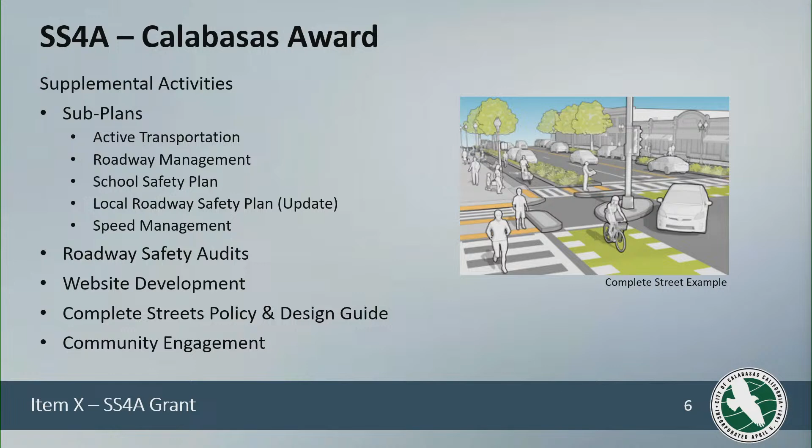Demonstration projects that we have planned include a Hawk signal at Mulholland and Eddingham. This is a project that we've been trying to do for a little bit and have been unsuccessful, and now we have the money to do it. That's that high activation crosswalk you see popping up everywhere in Los Angeles. It pretty much forces the intersection to become a signal when there's a pedestrian, and then once the pedestrian walk phase has ended, it turns into a stop, and then the signal turns off completely.

We're also looking to do a temporary roundabout at Las Virgenes and Thousand Oaks, a temporary Class 4 bikeway on Lost Hills Road, and then we can do mini grant competitions, so crosswalk art to get the schools involved and all of our students, and then a traffic safety poster series for the entire community.

Yes, Chair. Vice Question, Chair. What do you mean by temporary?

Since this is a demonstration grant, we're not allowed to do any concrete work. So the roundabout and the bikeway will be constructed with material that can easily be removed in case it's seen as a failure. So if the public doesn't like it, if it ends up becoming more of a problem than a help, we can easily remove it.

Usually how long is that trial period? We're required to have it in for at least 2 weeks, but some of these projects done in other municipalities have had them in for 5 years. Okay, well, a trial in for 5 years. So it worked out so well they were able to keep the demonstration material in. Oh, okay, well...

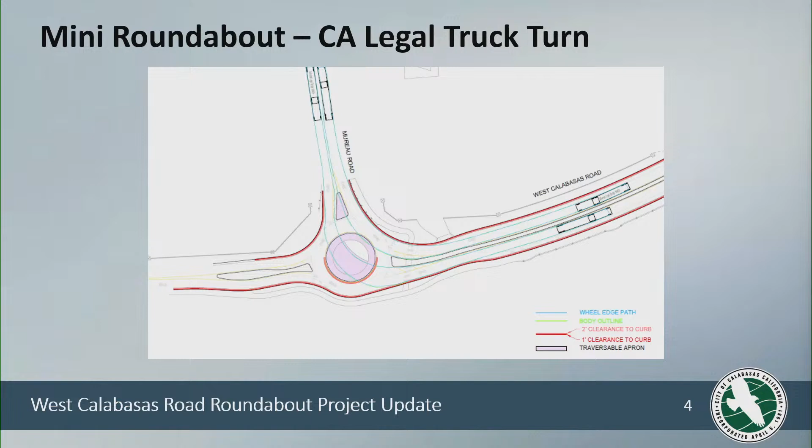By looking at all of that, and analyzing the cost estimate, the only saving — sorry, I'm jumping a bit ahead, but these are the major points — the construction cost saving was not as great as we expected from removing those retaining walls, as you can see from this exhibit.

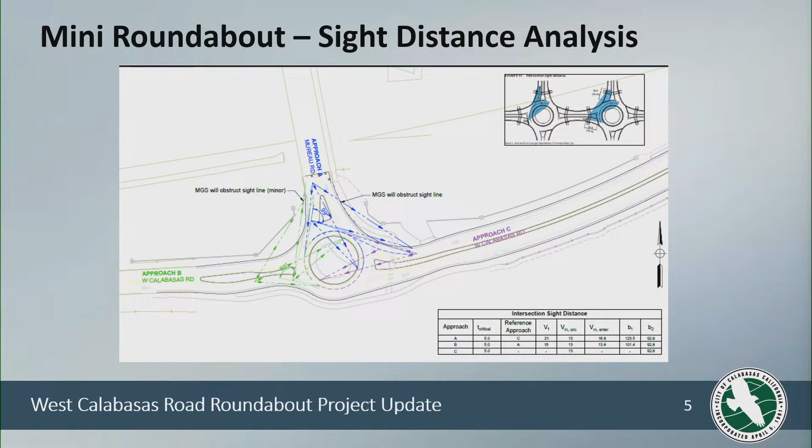Trot, do we have a picture of what's there now? I don't have it as part of my presentation, but we can probably pull up Google Maps to look at that. Okay, and I have one question, because I'm a little confused between the mini roundabout and the single roundabout — what examples do we have in the city of a mini versus a single? We don't really have a mini roundabout in the city.

We do have traffic circles, which is probably going to be the closest design option to the mini roundabout. Can you give me a location example? Traffic circles we have in Park Sorrento. Okay, yeah, those are traffic circles.

Those are not roundabouts. The roundabout is designed for the full movement, a full circle with approach, designed to slow traffic on the approach to the roundabout and direct the movements, angling them correctly so they go around. So those mini traffic circles are similar, but not exactly.

Just to add color, I think what you referred to as a mountable roundabout means that because the truck is wider, it would be able to go over the roundabout, since it's kind of like a bump in the road. Correct. The truck won't be able to make the full movement going around, so they would just go over it. Right, so that was one of our big concerns, that it will not be as effective.

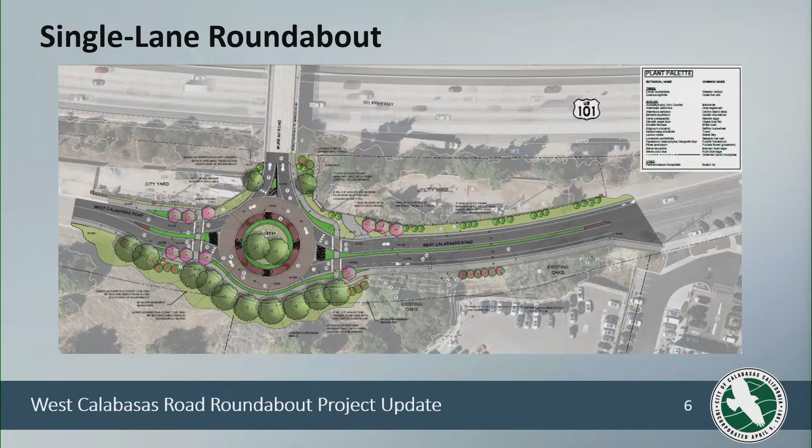That's exactly it, and this was actually the original idea. Staff recommendation, after we looked at this analysis performed by the consultant—and you have in your package the exhibits and the report, with more technical details in there, and if you have any questions I'll be happy to answer them—is to proceed with the single lane roundabout design. If you have any comments or questions you'd like incorporated into the final design, we'd be happy to take your input.

So what do you need from us, is this just informational? This is informational. However, if you have any comments or questions, this is actually a good time for us to take note of it.

Good. I guess my comment would be that the single lane roundabout would be the most appropriate way to go, since we still want some sort of barrier to protect cars or prevent them from plowing straight through—at least we have some landscaping in there that can provide that. I don't see any other option, so in my opinion this would be the way to go.

You mentioned before, but one more time, what problem are we providing a solution to? The traffic pattern at this intersection—you can see a heavier traffic pattern in the morning related to the school.

You also see traffic from the car dealerships going through the intersection, testing cars, going all the way to the west end of Calabasas Road. The west leg of Calabasas Road is basically a dead end, so there's not much traffic going that direction. For that traffic pattern, and as you're well aware, Mureau Road and this route actually serve as a detour when the freeway is backed up. Again, the west leg of the intersection isn't used much, so for this traffic pattern, a roundabout is the most beneficial design for this intersection to accommodate these movements.

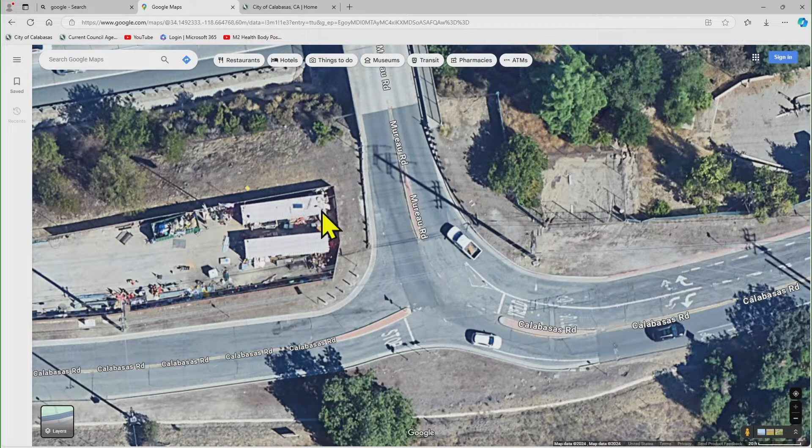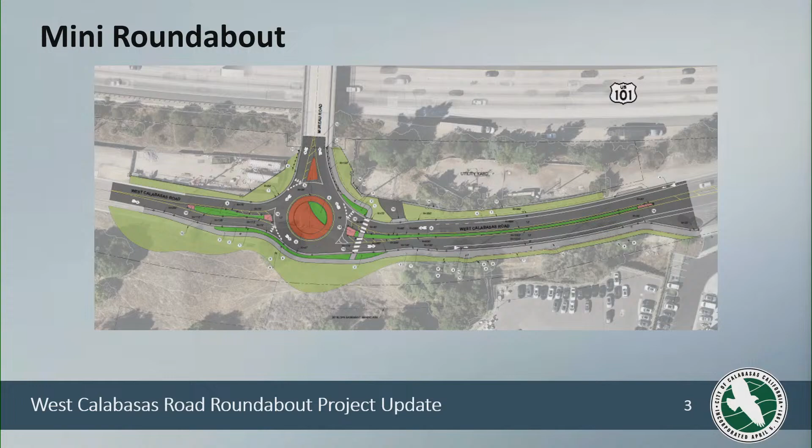There is a standard. There are certain design standards and design criteria for the roundabout—you can't just easily play with the width. That's what the designers are doing when they're looking at the size of the roundabout, but it needs to be according to the entire width. Then there's a travel lane width, and a certain diameter for this roundabout for it to work, to provide that circular movement.

Is it being tracked and monitored by any organization that comes to double check the work, to see how wide it is or how it's been built? There are just the design standards that the engineers have to follow. For example, for this design, we had a third-party traffic engineer also review it. They're experts in roundabouts, more so than the civil engineering company working on the design—they're well qualified in roundabout design too, but we also had a traffic engineering expert reviewing it.

Do you know how many we currently have in Calabasas? We have a lot of traffic circles. I don't know the exact number. Well, the biggest one that comes to mind is on Parkway Calabasas, right? That's a great example. And then we have a few other traffic circles—Paul Revere, and the Eddingham area. Yes, and there's Park Sorrento—there are three mini circles on Park Sorrento, and there are probably three or four more in that area.

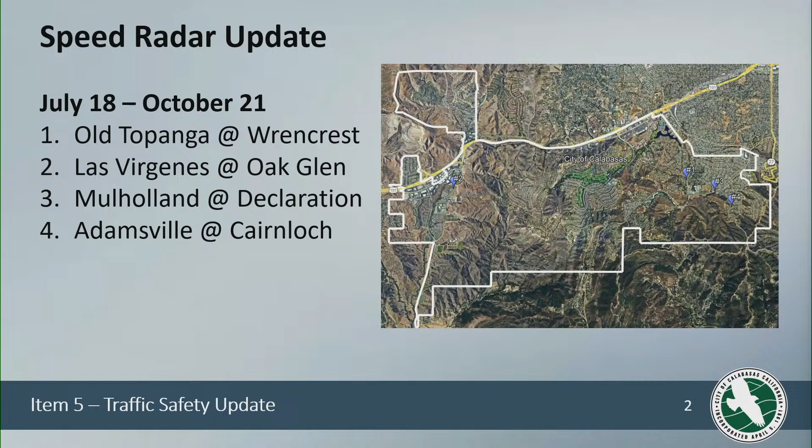Here's a look at our average speed, our 85th percentile, and our violator speed. One thing to note, we are currently working on that site number 2 for Las Virgenes. The device was incorrectly coded to a speed limit of 40, so we don't have the violator percent. They're working on fixing that on the back end for us, but I didn't have that in time for today's meeting. It is definitely lower than 7.7% though.

That's the violator percent if we say that that section of road is 40 instead of 45. And then Mulholland at Declaration, we do have a higher violator percentage of 6.8%, which we alerted the Sheriff's Department, and they're out there doing a lot of enforcement this year. And then on Adamsville, we have a violator percent of about 3.4, but our average speed is 28, so going downhill in a 25, that's very expected.

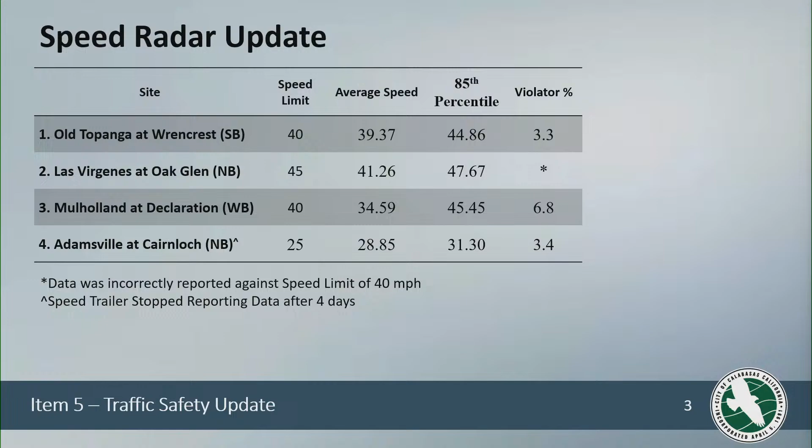Another thing about site number 4, is our speed trailer actually stopped reporting data digitally to us. We're looking to see if it's still recording the data and just not transmitting it, but we will have an update on how our trailer is doing, hopefully very soon.

We met with the Sheriff's Department last Thursday, and our enforcement priorities are Las Virgenes Road, and they are very focused on the school area traffic for Mulholland Highway.

Can you go back one slide? I'm not sure I understand when you say 85th percentile.

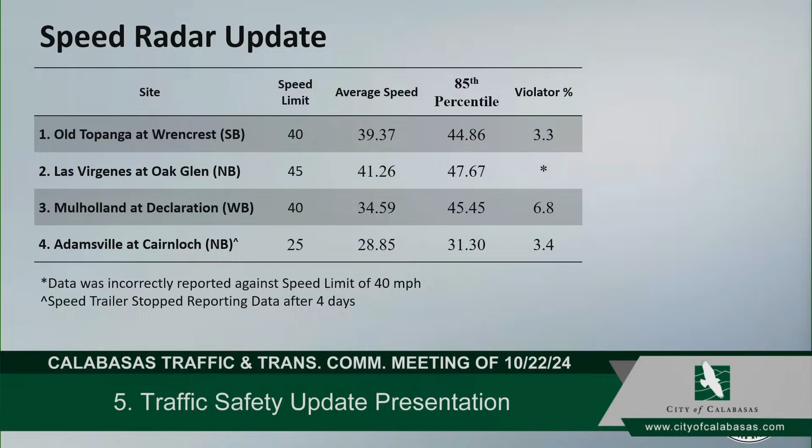So 85th percentile is, Tom Miracle explains this much better than I do. He's explained it a couple of times before, but the idea behind the California Basic Speed Law is drivers are going to drive a speed that feels comfortable to them. And when you're setting speeds, we are required by California state law to set them per the 85th percentile. So for example, Old Topanga, we look at the 85th percentile, almost 45, we get to round down to 40, and that's the current speed. And so it's that idea that on average, people...

Want to drive a safe speed, and we set the speed for that road. So for example, you don't want someone driving 40 because it feels good, it feels safe, and you've set it at 25. That's considered a speed trap.

Okay. Thank you. So I think it's important to note both speeds, the average speed that on average people are going, and then that 85th that we have to abide by. Okay. Thank you. Of course.

And then this is another informational item for you. So any more questions? Awesome.

Okay, next. Next is the division report.

I would like to start with the exciting news. The Las Virgenes Green Street project is complete, and we're having a ribbon cutting ceremony tomorrow at 3 p.m. at the site. And there will be a shuttle provided for leaving city hall.

But after meeting with the water district staff, it was determined that relocation is not necessary, so there will be no more disturbance to traffic. What we ended up doing, the contractor did the improvements shown in the picture on the right. We did the bright paint and additional sign for road narrows, and since that vault is not encroaching into the roadway, the water district is actually happy to leave it at its present location.

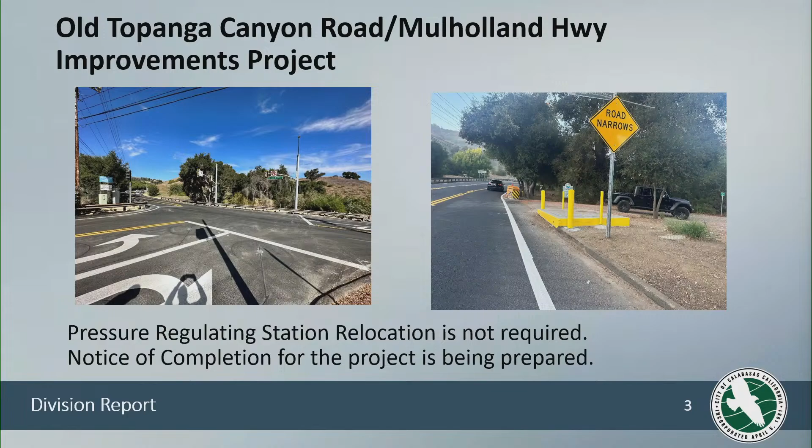On that, if I may, if you remember last meeting, I brought up something about that extra stop sign when you were on Mulholland heading towards Viewpoint and came to that three-way intersection. Whenever is the right time, you mentioned I can bring it up, I don't want to interrupt you. It's coming in my presentation.

Thank you. Next project I'd like to talk about is the bike lane conflict striping project, which was also reported previously to the commission when we started working on securing a permit from Caltrans to do this work, mostly to improve a stretch of Lost Hills Road between Malibu Hills and across the freeway to Canwood.

But since then, we added a few more locations. Thank you to our engineering staff, we added a few more locations in the city we thought would be important for this additional bike lane conflict striping, and those two locations are Las Virgenes Road and Park Capri.

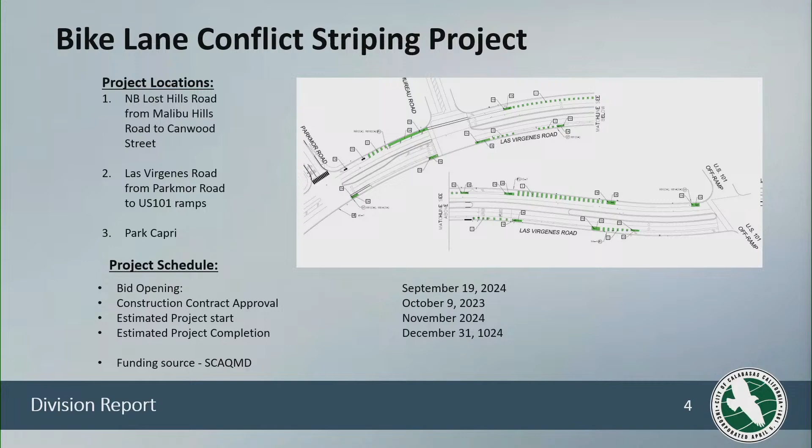So we added that and put the package together. We had bid opening on September 19th, and City Council already approved the construction contract. We're meeting with the contractor this week for a pre-construction meeting, hoping to start construction next month and complete it before the end of the year. The funding source is the Air Quality Management District.

At our previous meetings, there were two intersections brought to our attention. One of them was Mulholland Highway and Freedom Drive. Since then, we engaged our traffic engineering consultant, Kimley-Horn, to evaluate that intersection.

We collected the traffic counts, looked at the traffic patterns and geometry of the intersection, and they also looked at the warrants.

This intersection is not warranted for a traffic signal, but it is warranted for an all-way stop. However, for further analysis of that finding, the information provided shows this will increase average delay from 2.3 seconds to 237.9 seconds, which will bring this intersection to a level of service F.

So it will degrade this intersection. Also, it will increase the southbound queue of vehicles by approximately 51 vehicles.